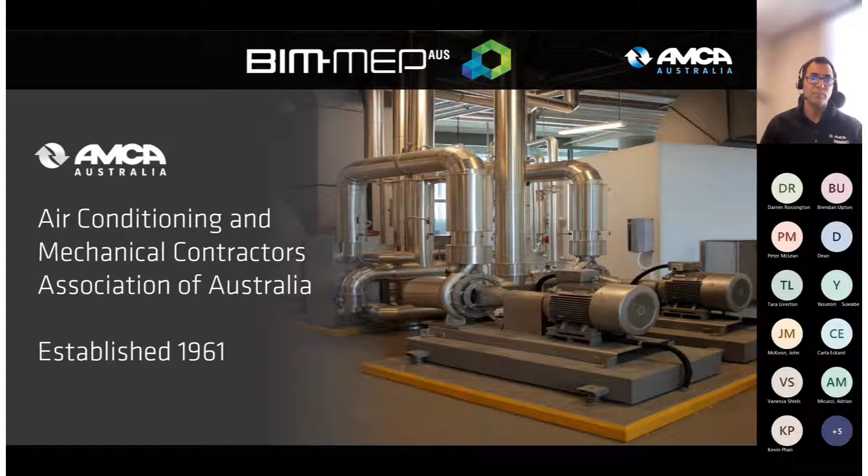So I'm just going to give you a bit of an update today before we go to Brendan. So just a little bit about the AMCA if you're unaware of who we are. So we're the Air Conditioning and Mechanical Contractors Association of Australia. We've been around since 1961. It's a national association, and we provide a range of services for our members. One of those is BIM-MEPAUS, which is AMCA Australia's initiative to drive digital transformation in the construction industry. And it's been running since about 2010.

The initiative itself is really a solution for consistent modelling and consistent documentation or asset information, really built by the industry for the industry. So we take industry needs into account in everything we do. So today I'm just going to quickly take you through some of the things that have changed over the last 12 to 18 months with regards to BIM-MEPAUS, what we're working on at the moment, and then what the future holds for the initiative.

So we've delivered quite a few projects over the last 12 to 18 months. Lots changed. So one of the things, quite a significant change for us, was a decision to bring full management of the BIM-MEPAUS initiative internally into AMCA Australia. So that really took off around April 2021. But from there, we then decided to create a whole new BIM-MEPAUS website to make it easier to manage our content and our subscription service.

Alongside that, in parallel, we created a completely new BIM-MEPAUS Revit template that was designed and built from scratch in parallel, as I said, with the website. And once those two things were really up and running and finished, that was around July 2021, and that's when we, I guess, officially relaunched BIM-MEPAUS and commenced management of the BIM-MEPAUS subscriptions internally and started engaging with the industry directly, which has been fantastic.

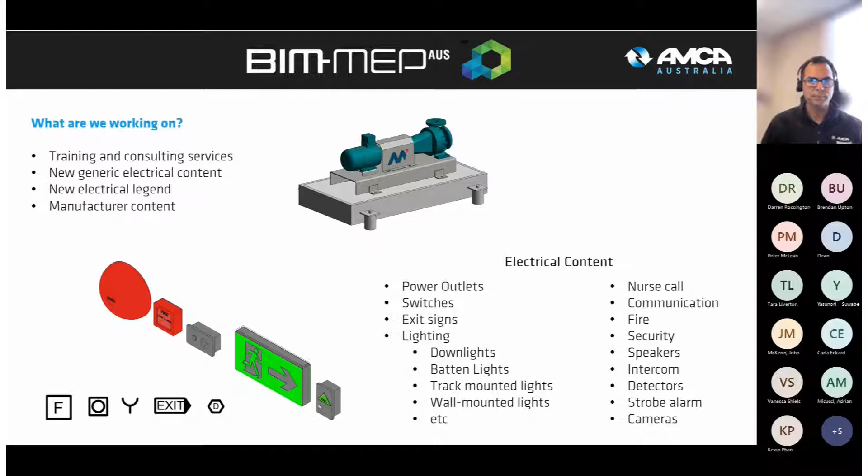So just in terms of that content strategy for manufacturers, we can really offer the manufacturers support and advice, and it's really based on 3 different scenarios. So if the manufacturer has a Revit expert in-house that develops their own content, we can work with that particular manufacturer and help them develop the content in line with BIM-MEP AUS specifications.

If the manufacturer has existing content, we can certainly do the same, review it and provide some feedback on its alignment to BIM-MEP AUS. And then if that manufacturer needs someone to create content for them, we've struck up a bit of a partnership with IGS, who are a local content developer here. So we're working with IGS to help manufacturers develop new content, and that's the path that Masterflow took.

Also, our manufacturer content strategy is not just important to BIM-MEP AUS but also to our members. Our AMCA National Board of Directors have recently written a letter to endorse the manufacturer content strategy, which we're sharing with manufacturers as well, really to develop that quality and fit for purpose content.

So we're really looking forward to doing more in this space over the next 6 to 12 months. What does the future hold? As I mentioned earlier, we're expanding our training program. I spoke about the pathway we're developing, the industry certification, the CPD points, weaving in the Autodesk Construction Cloud services. Our electrical content library and legend will continue to evolve and grow as well. I already spoke about the manufacturer strategy on the previous slide. Next year, we've also set dates for user groups.

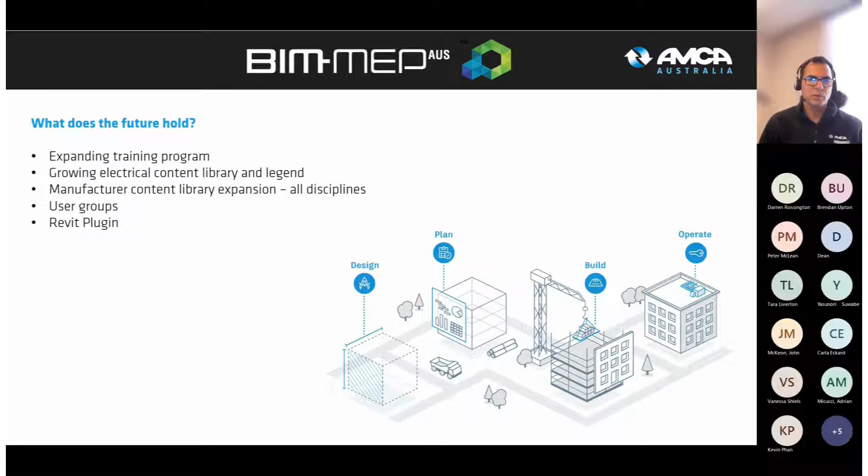Just before I move to Brendan, I'd like to let you all know that we've set a date for our Construction Innovation Forum. That's set for the 17th of May next year, in Melbourne. We're just in the planning phase at the moment, setting our streams and technical sessions and things like that. Keep an eye out for some of our news items to come out to provide more detail around the forum, and as we publish it, we'll also post things on our website to give you an update on these things.

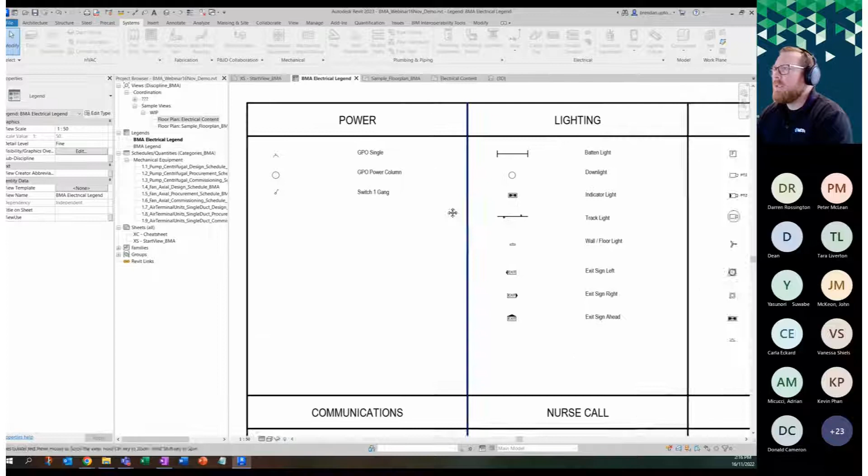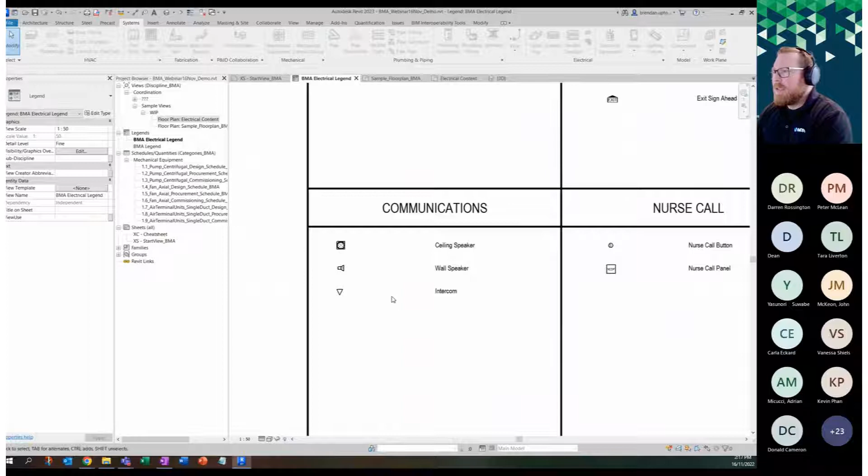We've got some lighting, typical kinds of lighting and exit lighting symbology families. We've got a group of security items, including cameras and detectors, etc. We've got communications, speakers, intercoms, and the beginnings of some nurse call families there as well. Now, all of these symbols that we're seeing here, I'll show you in a minute, we have the actual component families, 3D families for as well.

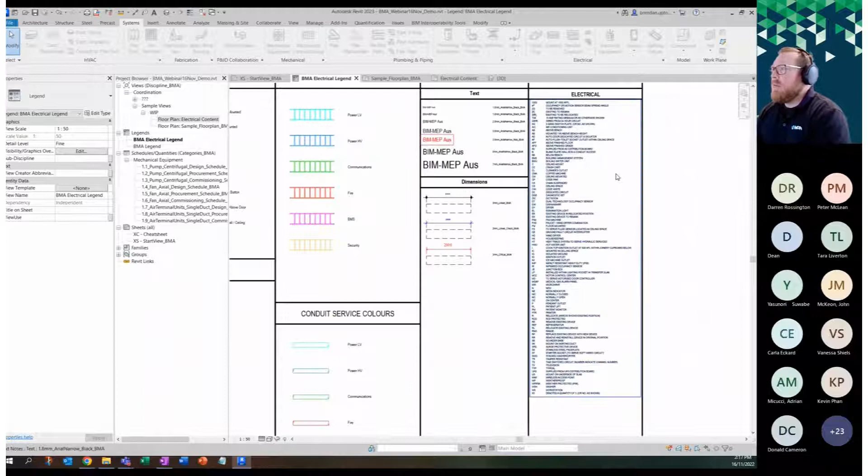We'll jump into those in a second, but just here also on this legend, you can see that we've started to bring in some typical electrical abbreviations, as well as your standard BIM-MEPAUS text styles and dimension styles. Also along with the cable tray and conduit service types and colorations there, as well as per the BIM-MEPAUS specifications.

So this is a starting point. Our goal here is to obviously expand this, as Shannon mentioned. When this is released shortly, we'll be keen to gain feedback from you as the users to say, what do we need to include, what further items do we need to add in, etc., and how are the symbols working and looking. It'll be good to start getting that feedback as it comes through, and we'll look to develop that further. So moving on to have a quick look at this actual electrical content.

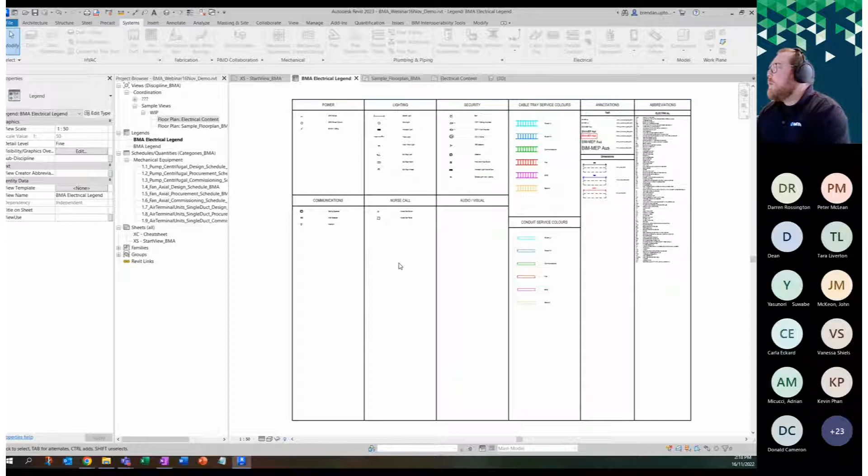If I jump into this view, these are the plan view symbols of those 3D families. If I jump into the 3D view, we can see a grouping of these families sitting here, so there's a bit of a selection. Our idea was to have a good kit of parts of the typical, more common families required in electrical design as a starting point.

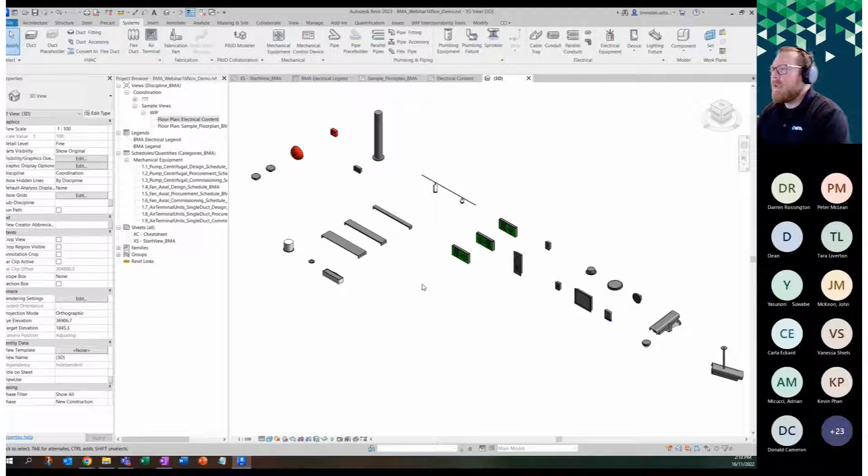And then we will go from there. These are all built to the same BIM-MEPAUS standards that you will be familiar with if you've used the template elsewhere in all of our existing generic content and manufactured content. So all built to the same standards.

Just to highlight some of the features to look out for in these families: they are all built as work plane based to give you as the user a bit more flexibility to place these into a project without having to rely on hosts, but still have the ability to align and lock them to hosts and planes as well.

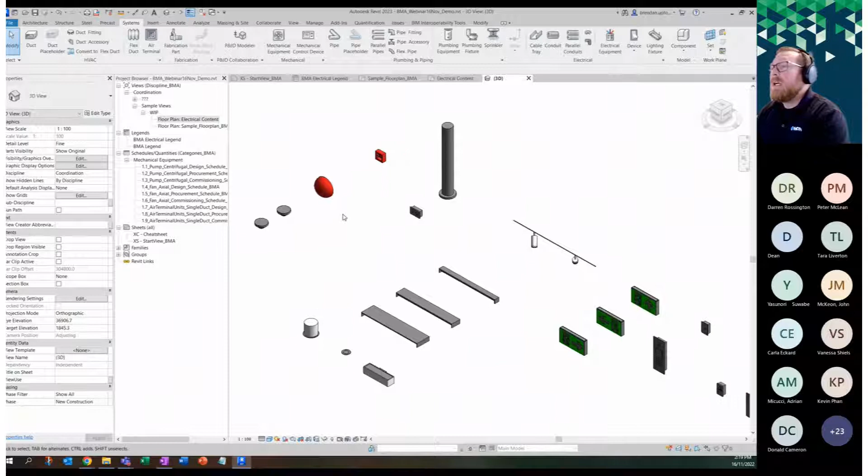Some other features to highlight, if I go back to plan view, if you change the detail level to fine, you will see the 3D geometry representation. But in coarse and medium is where you will see the symbology, the symbol representation of the families.

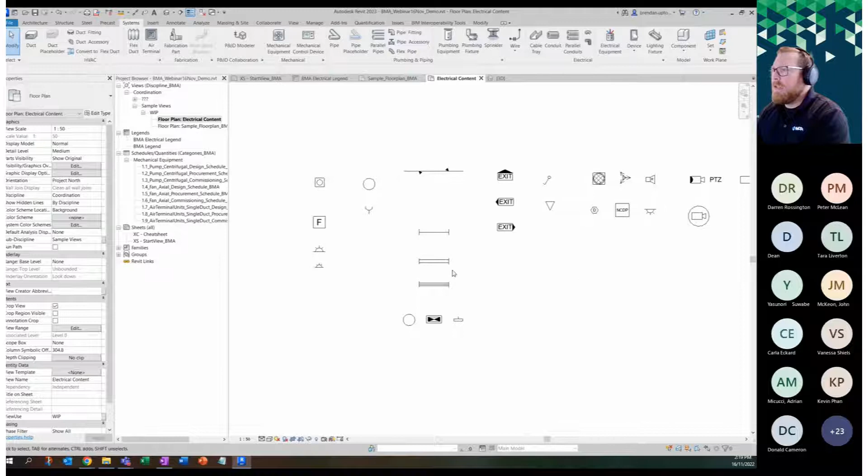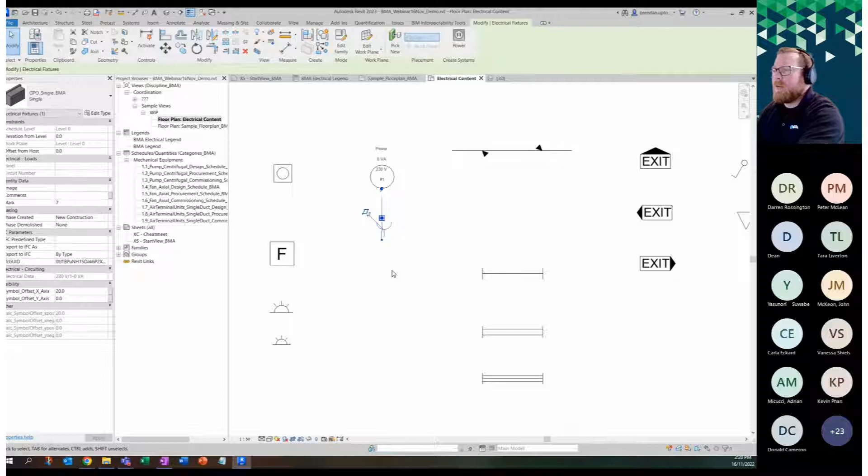Also, where applicable, we have incorporated the ability to offset the symbol independently of the 3D geometry. For example, the GPO outlet has offset X and Y axis controls, giving you the ability to push the symbol around if they're getting on top of each other, overlapping, or in line with each other in a plan sense on the wall.

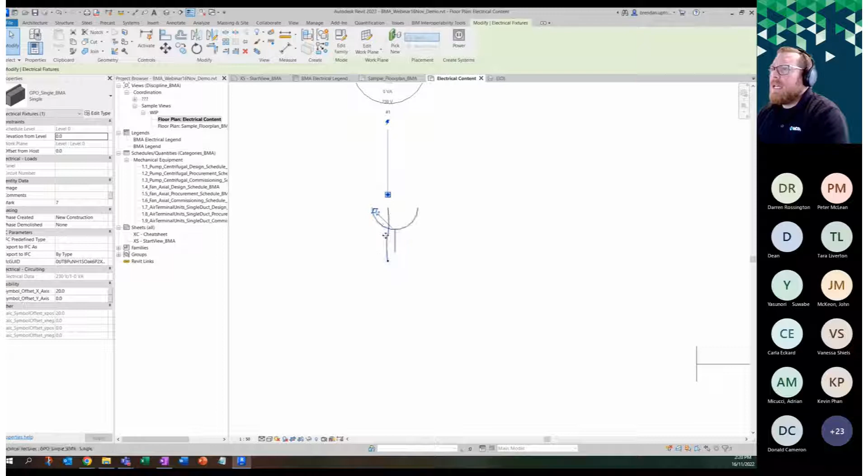One other thing to note, you might notice this little squiggly line here and wonder what that is. That's the room calculation point feature. For those who don't know, it's a feature that allows you, even if the family is sitting outside a space or room in the project, to use that point to position an endpoint into the room so that component gets calculated within a particular space or room. We've activated those on all the families where applicable.

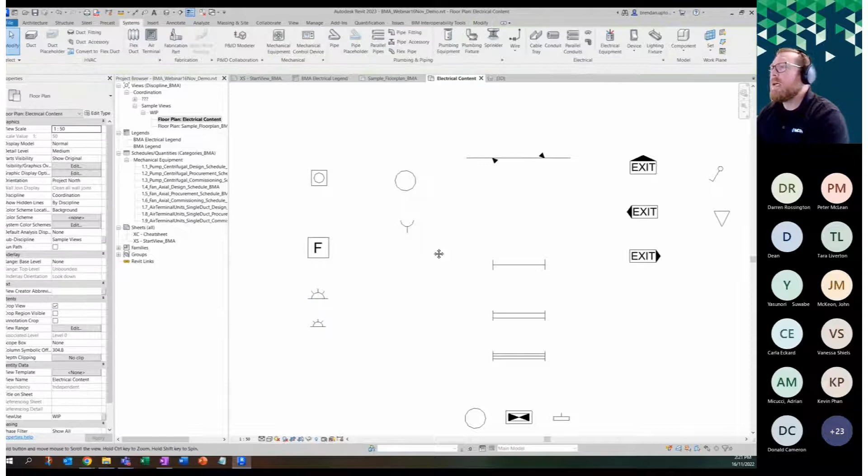We've got, like I said, these exit signs, which give you the ability to switch between different directions. So that's the starting point. I'm sure there's probably more we can do with exit signs as well, but again, this is a good starting point.

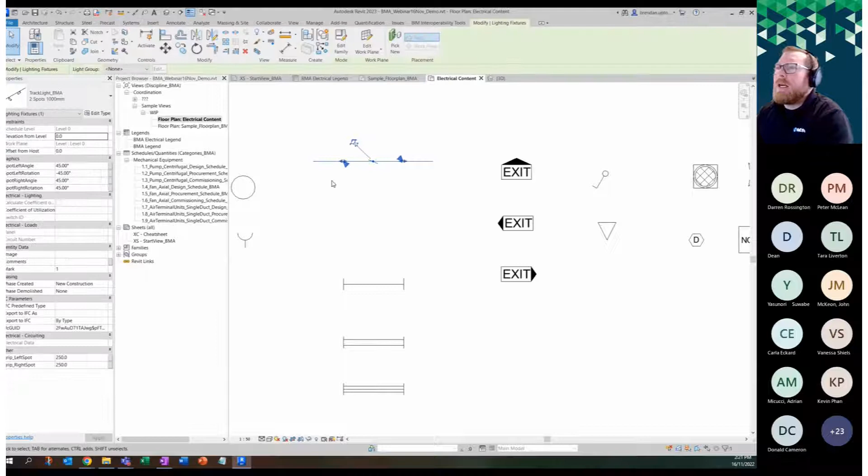Let's have a quick look at some of the lighting fixtures here. For something like the track lighting, we've given the ability to not only reposition these lights on the track, but also adjust the angle. So I could put it at a different angle there, and it will rotate the light fixture accordingly. You can see that's rotating the fixture. Also the tilt angle as well.

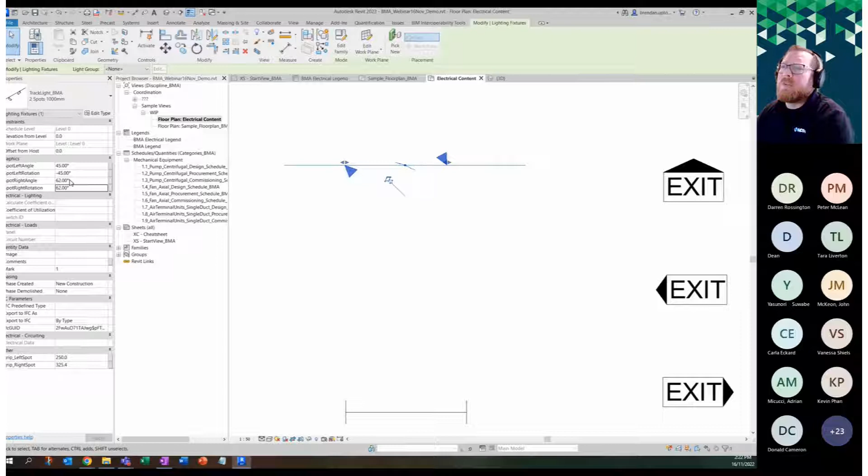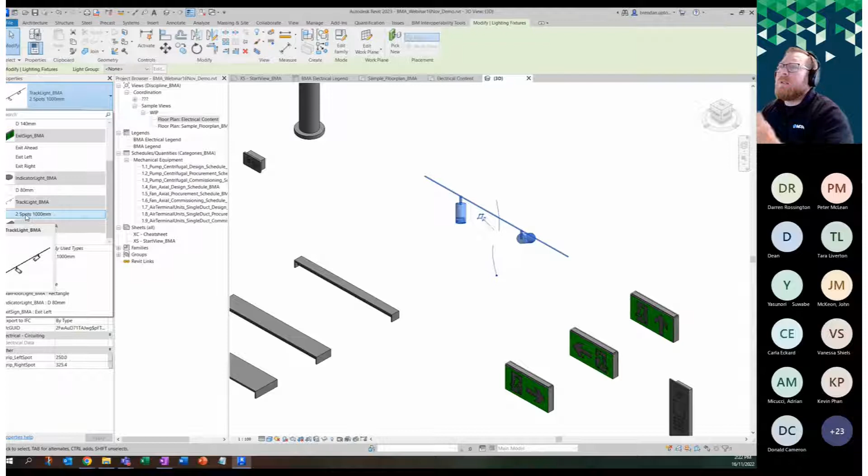If I go to the 3D view and adjust that, you can see it's rotating the fixture around, so a little bit of flexibility there. These can be placed and snapped together if there needs to be more in line. At the moment we've just got the two spots, but again in the future maybe there's room for that to be increased, to have the ability to add additional lights to the one track perhaps, so there's some opportunities there on that front.

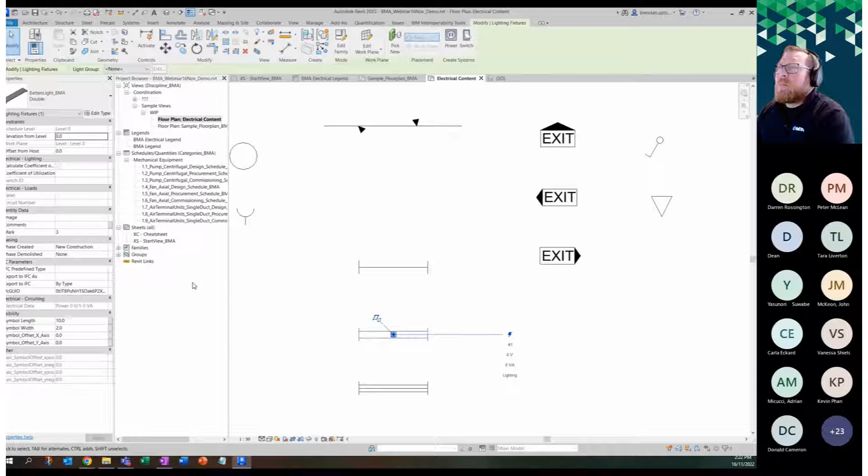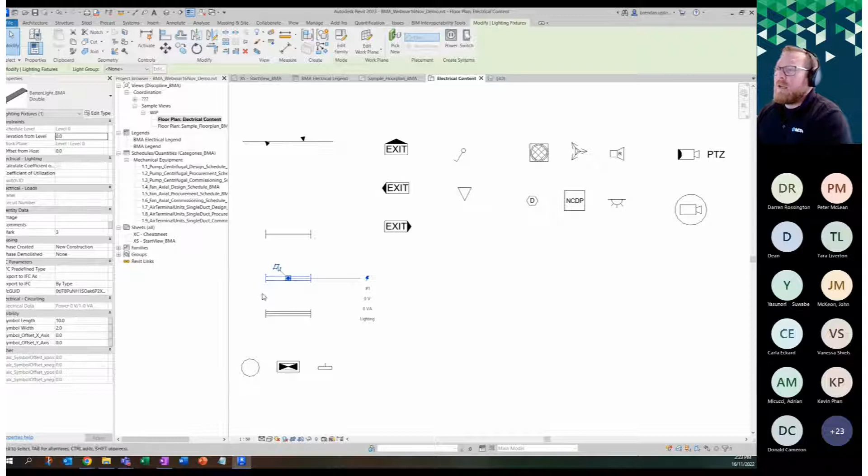One thing we have also taken into account is that we've added to these lighting fixtures, where applicable, compatibility with the photometric files that lighting analysis tools like Illume tools use. As Shannon mentioned, most of our electrical families, where applicable, are working with PowerCAD for cable sizing and other electrical calculations. In terms of lighting analysis, we are working as closely as we can with AGI and Illume tools to build these lighting fixtures to suit.

We are aware that many of you electrical engineers, consultants, and contractors are using something like Illume tools and want the ability to have these calculated within those sort of tool sets. So that's something we're looking at closely and keeping an eye on.

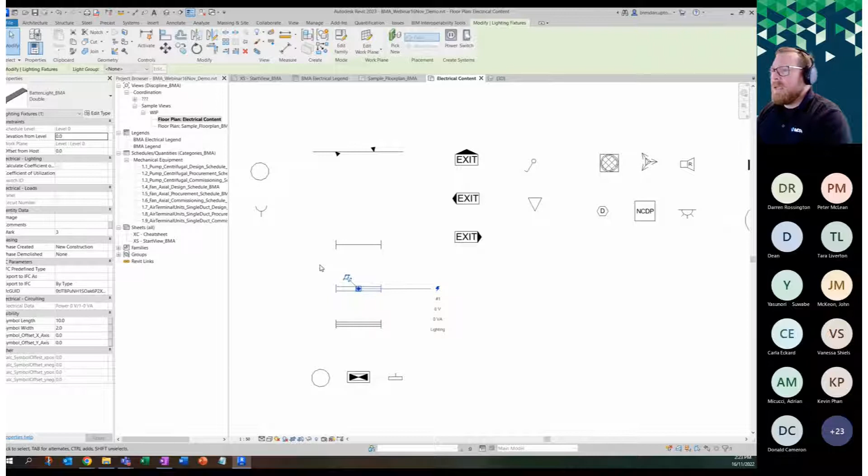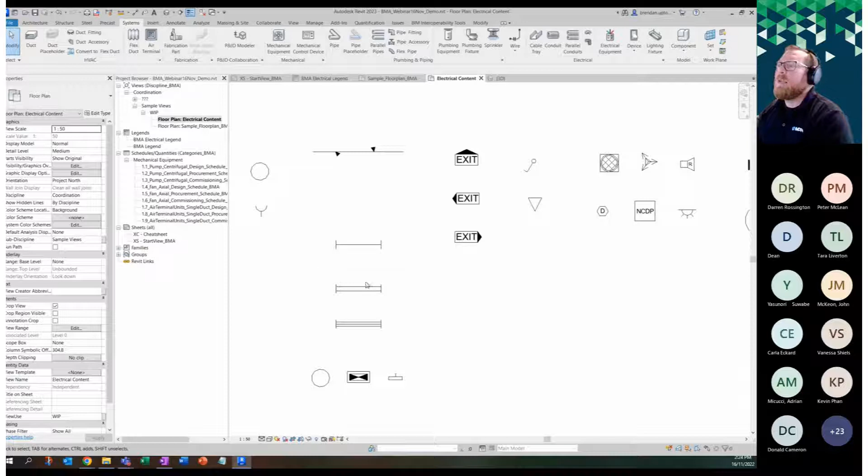Further to that, we're also looking at the training side of things that Shannon mentioned. We're working closely with AGI and the Illume tool set to incorporate some of that into our training moving forward, including some advanced training courses. Keep an eye out for more info on that coming through shortly.

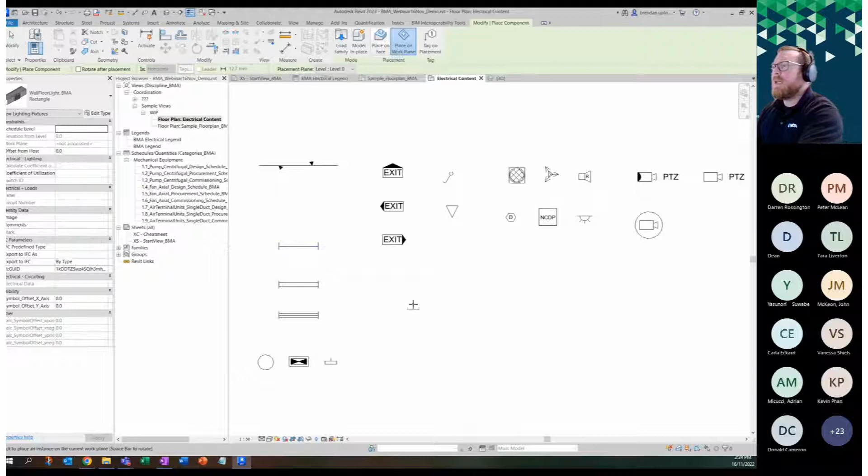So a few of those other lights - we've got down lights, typical down lights, indicator lights, and also a wall and/or floor light box. Again, it's work plane based, so when placing it in you can select place on work plane, and either align it to the floor or align it to a wall and adjust its offset from that level. That's how they all typically work.

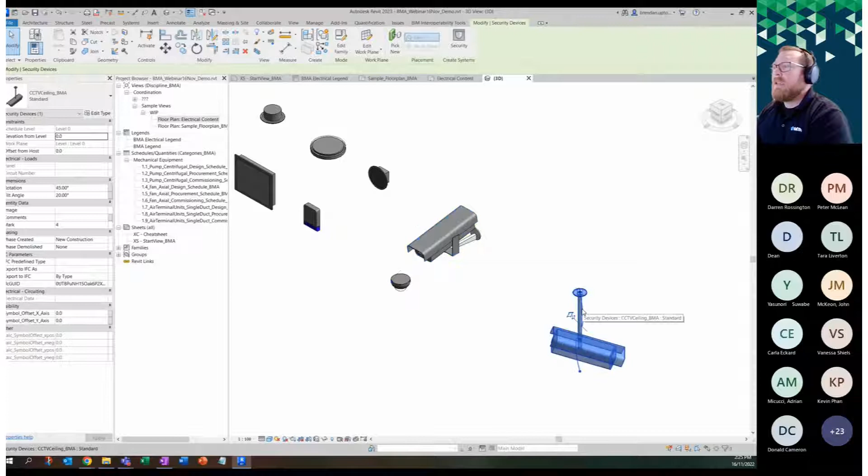Probably one of the last things to show you while we're on this content is, similarly to the others, some of the features of these cameras. These CCTV cameras - we've got a wall version and a ceiling mounted version. With both of these we have rotation and tilt angle options that allow us to adjust those values. If I adjust the tilt angle, I can get it to move around accordingly.

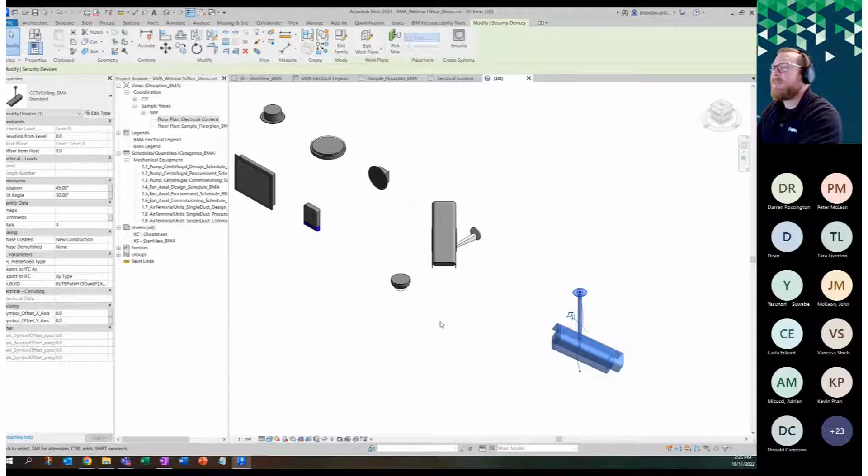Similarly with the ceiling one as well, we have a tilt angle here that can be adjusted. So if you're in the electrical discipline and have some use for these, we'll be very keen to get you testing these once released, and get your good feedback so we can continue to develop these further and build even better quality and additional items.

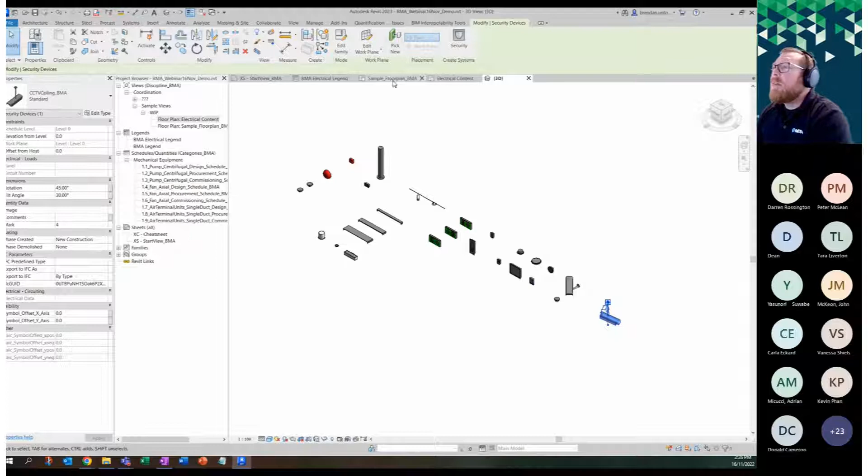So moving on, if I jump back to the floor plan view, there's another area I wanted to highlight. This has been in the template prior to this last release, but it's still fairly new, so some of you may not be as familiar with it. This is to do with cable trays.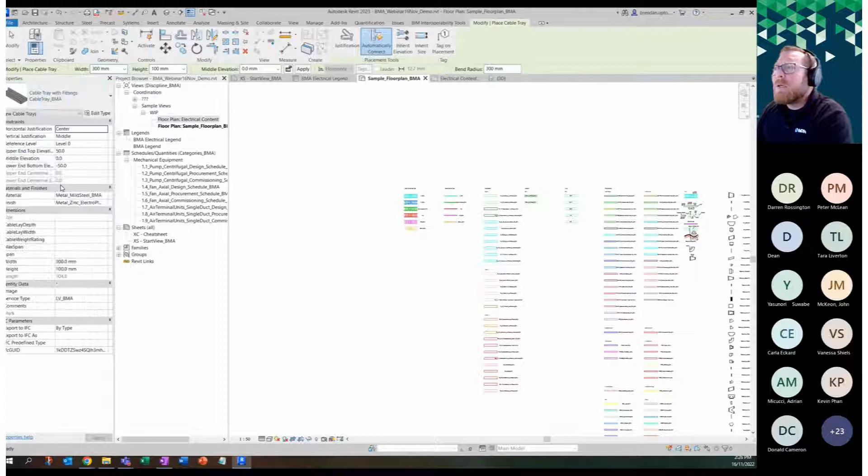Still while we're on the electrical topic - with cable trays there is a newer clearance zone functionality that we've introduced. I'll quickly explain how that works. If I jump across here and model a bit of cable tray really quickly, I might just change the elevation height there.

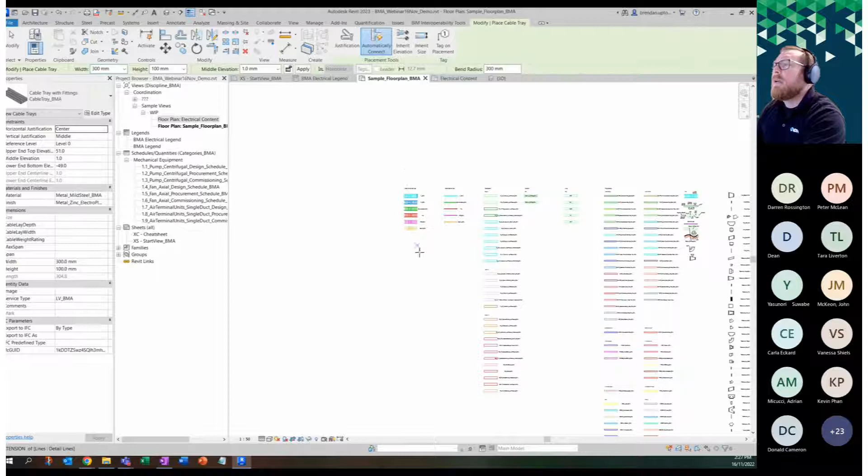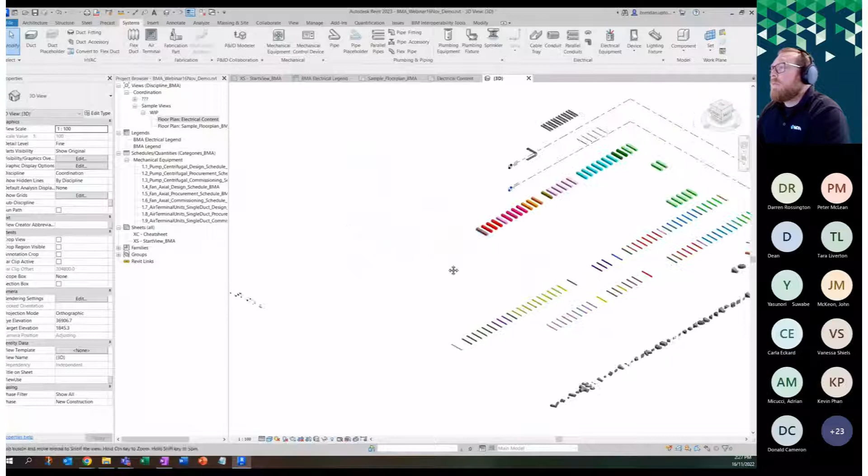So if I just draw a piece of cable tray here, I'll draw it, let's say 2100 long, and turn the corner, go 2100 again. Okay, so I've just drawn a very basic piece of cable tray here. I'll flick to the 3D view because it's a bit easier to show - here's that piece of cable tray I've just drawn. I'll zoom in on that.

Basically, prior to this functionality, what we had in terms of clearance zones was a separate family. Previously in the BIM-MEPAUS template, it was a separate family that was essentially just a changeable 3D box that users could trace over the top of any cable tray they had modeled, then change the height and width - that was essentially the clearance zone. It was a solid extrusion, with transparency so you could see through it, but it allowed it to be clashed against, so it allowed for cable tray brackets, rods, and that access area around it to be coordinated and clashed against.

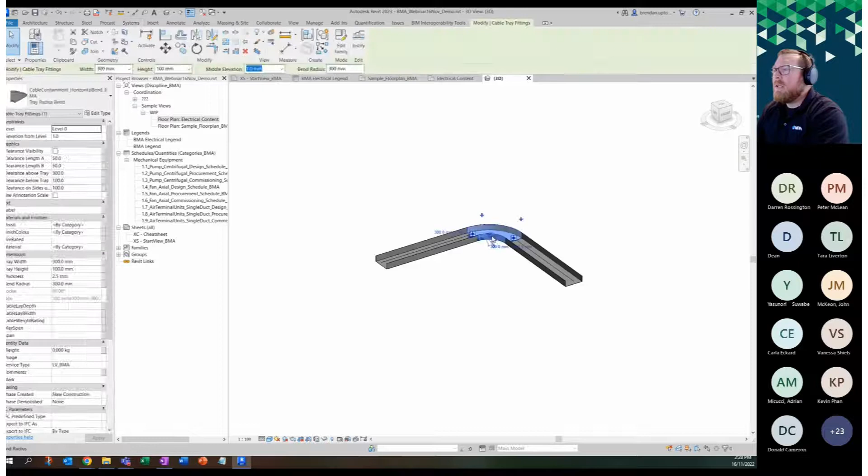That was all well and good, but it was a little bit limiting, and it meant a lot of management - if things moved, if the tray moved around, they had to come back and move with it, and it was a bit of mucking around. So the new iteration of this clearance zone and cable tray is a little bit better. It's still essentially a workaround to a certain extent, but it's more locked in and automated. I'll quickly explain.

Basically, what we've done is we've built into the actual cable tray fittings families a clearance zone solid geometry. So if I select that elbow there, that bend, I'll turn on the clearance visibility here. You can see it turns on that zone. And then we have some other options here for the clearance length A, length B, and also the height, so tray above, tray below, and width, so sides of tray.

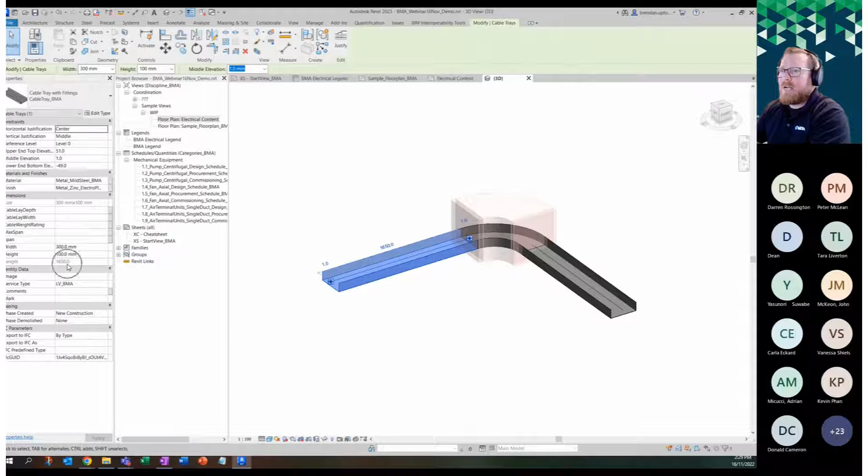So basically the idea is that it has an extension along the straight essentially. So the idea is that you interrogate and ascertain the length of the piece of straight. So it's 1650, and then you add that to the clearance length A parameter, and that will push that out there. This one here is about the same at 1650, so I'll do the same for clearance length B. Okay, and that will move that around.

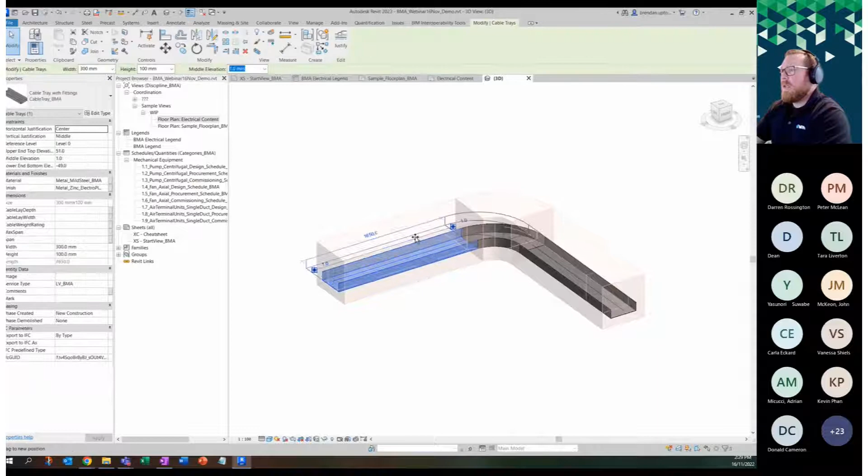So what that means is that if the tray moves to an extent, it will pretty much move with it. It just means that there'll be at least one length that you'll just need to update basically, but everything else will move with it. If it goes up and down, if the elevation changes, it's going to move with it. Okay, so it's a little bit better functionality there.

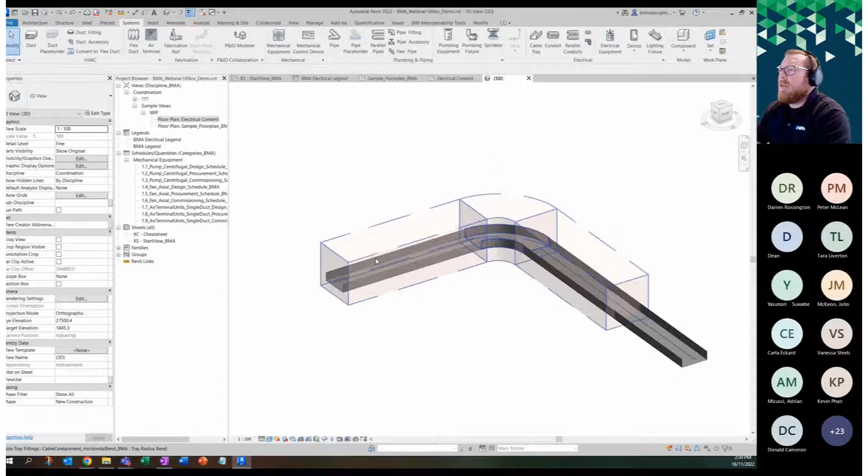And as I said, it is still just a solid extrusion. It's got a transparency on it, so it will allow you to be able to be clashed against, and you can change the height and the width of it as well. That's all done within the properties of the family. Okay, so just be aware of that.

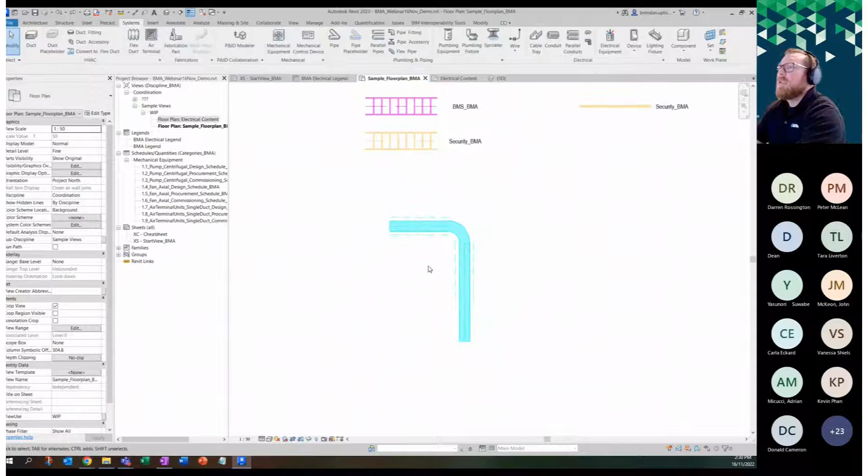If in the plan view, it has a representation to show that clearance zone on as well, if it is switched on. Okay, and within the template itself, there is actually a new little cheat sheet here view under the sheets section, and if you open that up, it has a bit more of an explanation about how that clearance zone works. So you can refer to that.

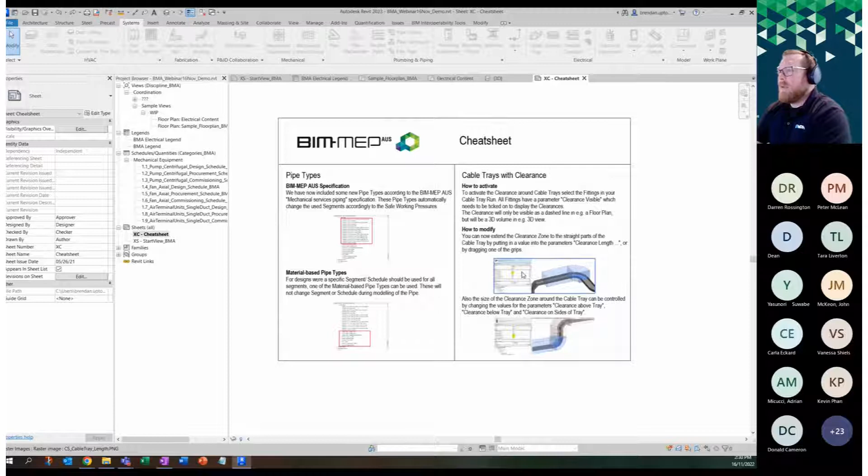But any questions on any of this functionality, obviously, you guys have the ability to reach out to us. There's always opportunities to ask questions and give feedback, as I said earlier. But this cheat sheet is something we will look to expand as we add more newer features into the template as well. It's a good way to communicate some of this functionality as well.

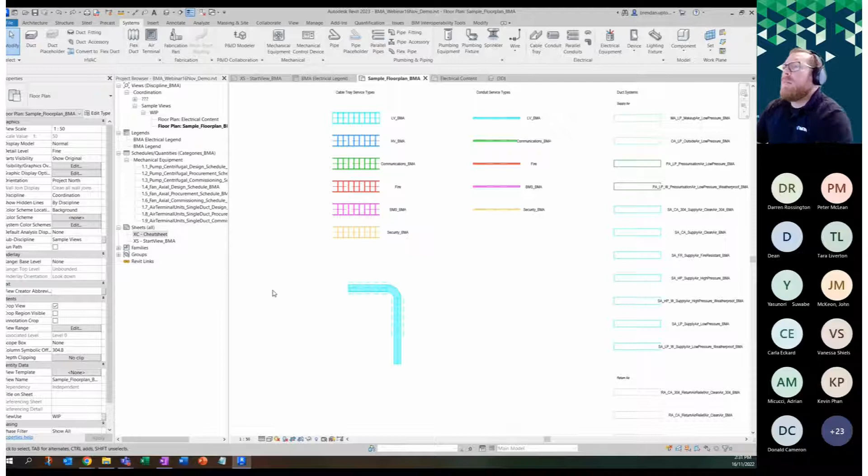All right, moving along, we have some on the piping side of things. Okay, something that's reasonably new as well.

If I jump over to the pipe tool, we have the same pipe types that we had previously in terms of material types. And for those of you that haven't seen, we then had those new pipe types introduced as per the BMA piping spec, which outlined the pressure classes and the jointing specifications for your different mechanical pipe work. So that's all still here.

We've got the different pressure ratings here, and then you can see, for example, you've got copper going up to diameter 50, and then it goes to copper press fit, and then above diameter 50, it goes to copper brazed. And so there's a whole bunch of those. There's carbon steel, there's welded, etc. So there's a whole range of those, and the details of those can be explained and can be referenced within the BIM-MEPAUS piping spec.

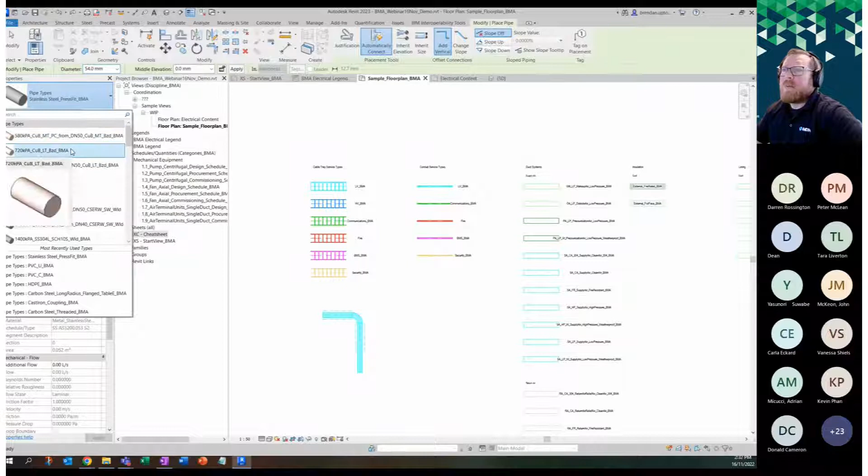So if you do want to know more about that, please refer to that, which you can access on the BIM-MEPAUS website under the specification section.

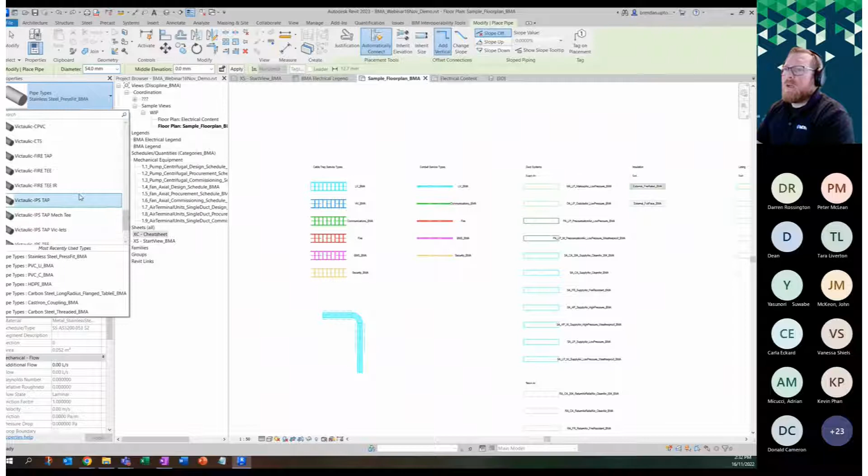But the other thing I just wanted to highlight here with regards to the piping is that we have also introduced, some of you might be familiar with previously, we had a couple of Victaulic pipe types in there. We have been working closely with Victaulic, as we always have been, and we've introduced essentially the entire sort of Victaulic piping range. And so you'll see there's a bunch more Victaulic pipe types in the template itself. And these have all been updated to the latest functionality for those as well. Okay, so be aware of that.

One little thing on the duct fittings to just highlight here as well is with the new iteration or new build of this template at the beginning of this year or end of last year, as Shannon mentioned.

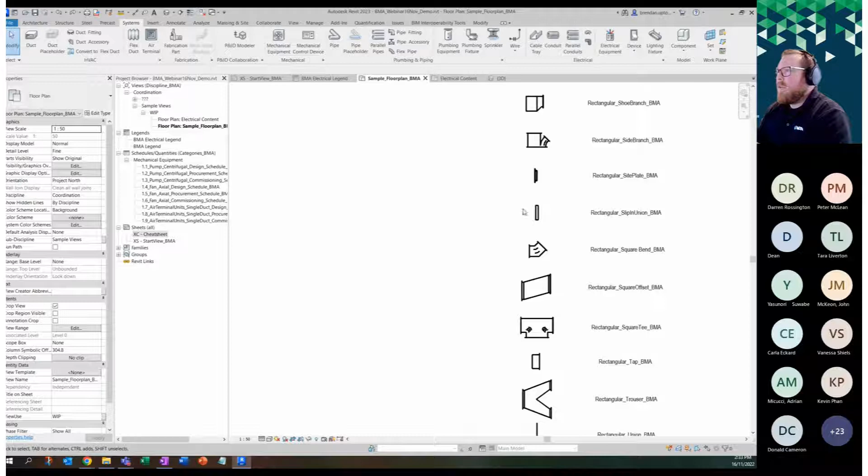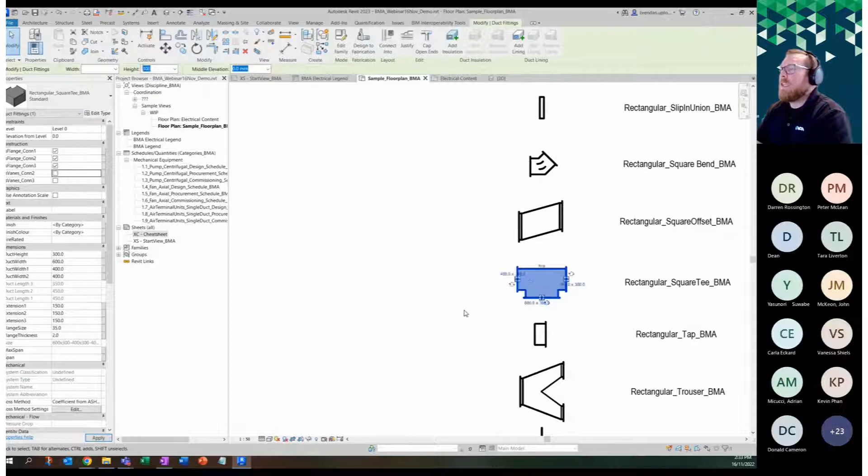Since then, there's a few things that we have been revisiting and refining as we go. One of those things is probably not so much a major thing, but is the turning vanes on applicable duct fittings. We're looking to make sure that those are all functioning correctly. So having the ability to turn those turning vanes on and off, and even potentially adding in some further functionality on those into the future too. So watch this space around that. We may have some more updates on that shortly, or within the next template release as well.

All right, I'm going to switch over to talk about the pumps now. So this is coming back to the manufacturer content. Shannon mentioned the Masterflow pumps, which we've done a bit of work with. We'll have a quick look at those, and I'll show you how they function within the template and how they, for example, schedule with our standard BIM-MEPAUS industry schedules that we have defined within the template.

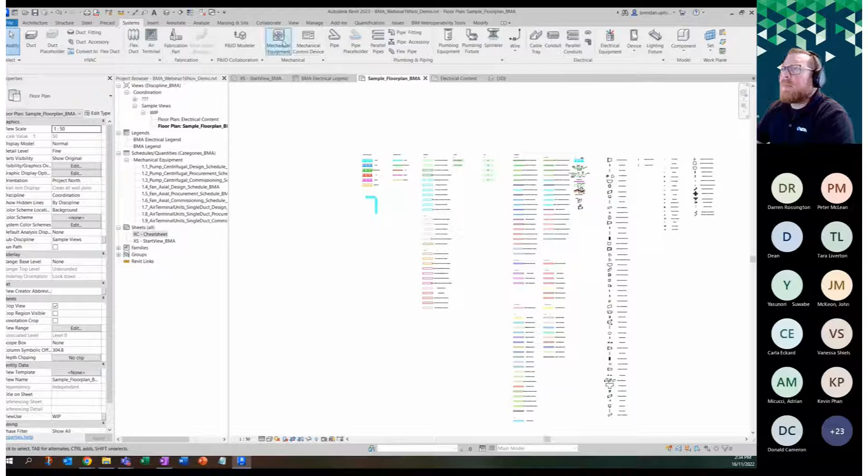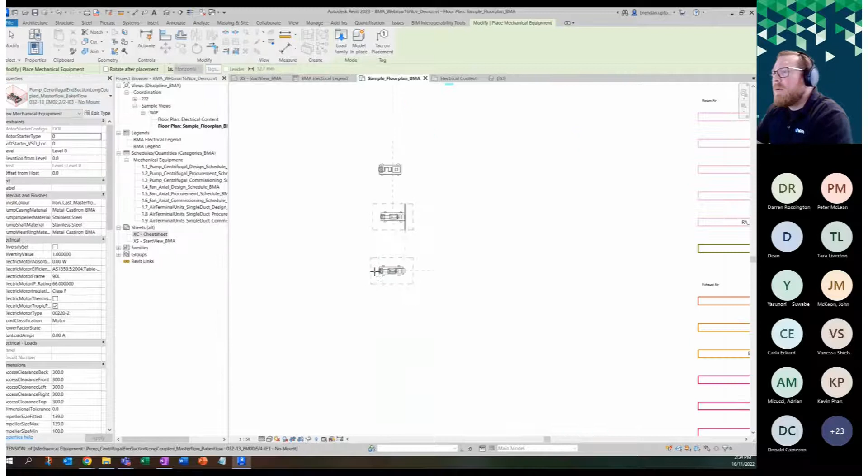So if I quickly place our BIM-MEPAUS generic pump, I'm just going to place one of those in here just for reference, so I can show you how that schedules. And then I'll bring in the Masterflow. I'll maybe do a couple of iterations of this Masterflow centrifugal pump here. So I'll do one, and I'll do the 2.2. That will do. Now, in terms of the functionality of these Masterflow pumps, I'll just jump to the 3D view. So here they are.

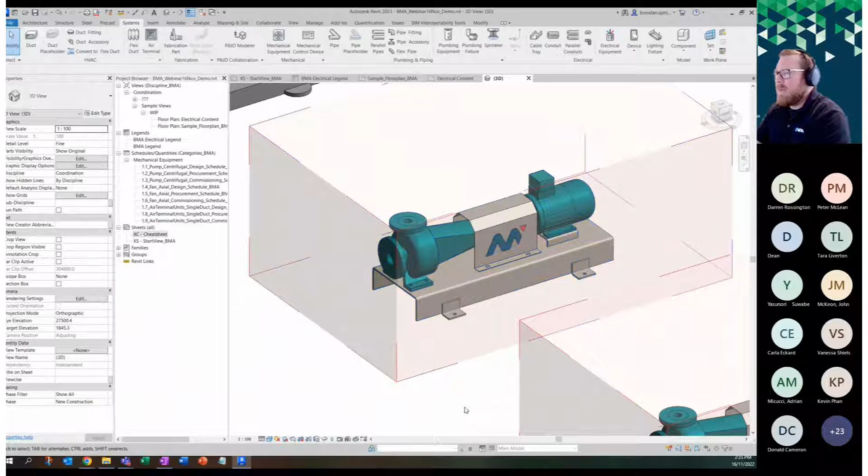So first of all, graphically they're looking pretty good. Geometrically, they are as detailed as they need to be, but not over modeled. So they're still quite efficient families, but they still look quite decent and look the part. Like what we always say with the manufacturer content or any content in BIM-MEPAUS, looking at it, it's generally easily recognizable as to what it actually is, and further to that, what actual manufacturer it is as well. So you can see we've got the Masterflow logo and whatnot. But more importantly, the functionality of the family. We've got things like clearance zones that are able to be switched off and on and resized.

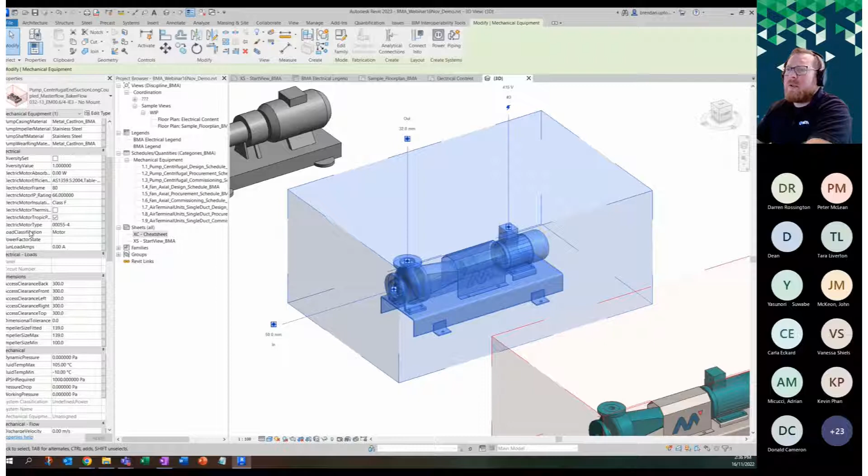And then even more importantly is the data side of things. We've got the whole gamut of the BIM-MEPAUS shared parameter data sets that are loaded in and accessible on the family. So not only has this been built to the manufacturer Masterflow specifications, but as we always do with the manufacturer content, we've incorporated the BIM-MEPAUS shared parameters where applicable, so that they schedule accordingly in our projects. I'll give you a quick look at that now.

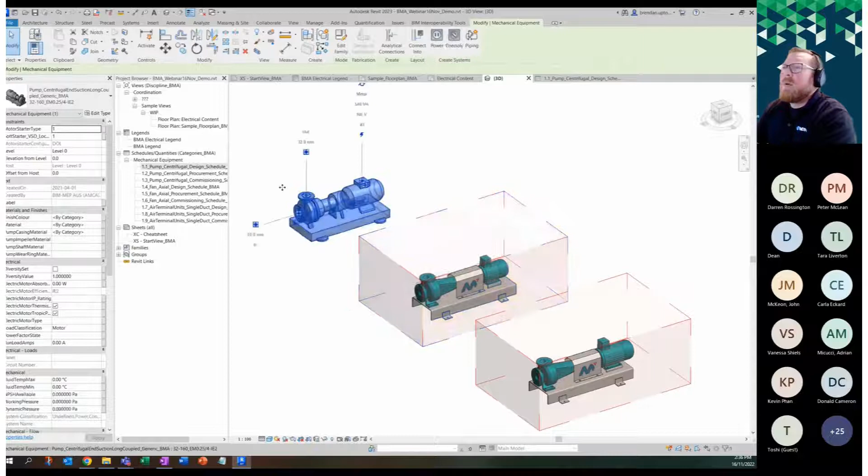If I jump over to the centrifugal pump schedules here, and go to the design schedule, which essentially will just display generic pumps, which is what this one is. If I jump into that schedule view, you can see there's that generic pump, and I'm not seeing the Masterflow ones because there's filters in the background to control what's shown on what schedule. If I have a look at the properties of the generic pump, you can see under the identity data that it is just a generic, and BIM-MEPAUS is displayed here as the manufacturer, because it's just a generic pump. There's no branding.

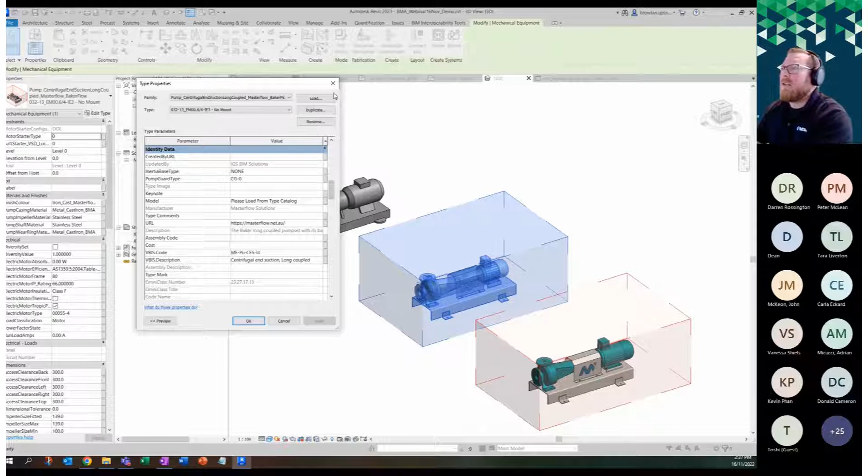Whereas if I click on the Masterflow pump and we have a look under the identity data, you can see that it has Masterflow in there and details about its model and model codes and things like that. As well, we've introduced VBIS codes into this, which we are heavily using nowadays for categorization, filtering, scheduling and data export. So that is what Revit uses to differentiate this from a generic pump, and hence why it displays in certain schedules and doesn't in others. So coming back to the schedule view, there's a filter to say only show the generic pumps in the design schedule.

And then as we come across to the procurement schedule, you can see there's those two rows representing those two Masterflow pumps that I placed in this project. And here's a clear representation of the detail of what parameters are included. These are all BIM-MEPAUS parameter sets. Some of these values in this case will be 0 or not calculated because it's not connected into a system at this point.

But you can see most of this is for the user to then start to fill out and populate. So just to be aware that, just like all of our other manufactured content, these pumps are built to that same consistent standard so that they will schedule correctly. And then you are able to pull that information out of Revit and go outside to other databases for procurement, for commissioning, moving forward into the project phases as well, for example. Okay.

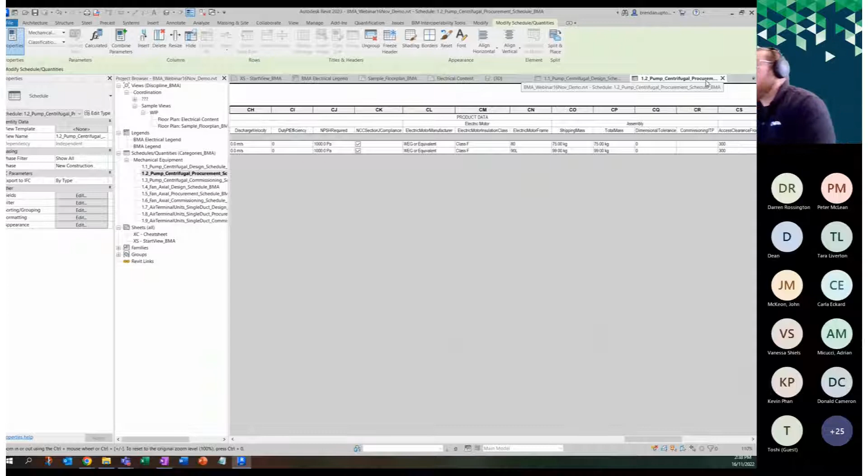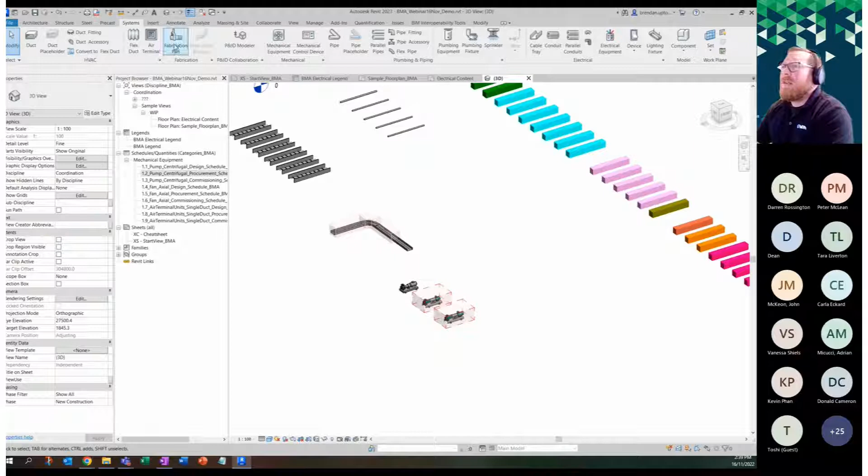The last thing I just wanted to jump into here, guys, was to have a quick look at the fabrication content. Shannon mentioned that there has been an update to that content over the last 6 to 12 months. A couple of major updates and overhauls, rebuilds of the database. So I just wanted to highlight some of those. There's quite a lot of updates, and you can reference the whole list of updates on our website. If you go to the fabrication content section, there are some PDF documents that you can download.

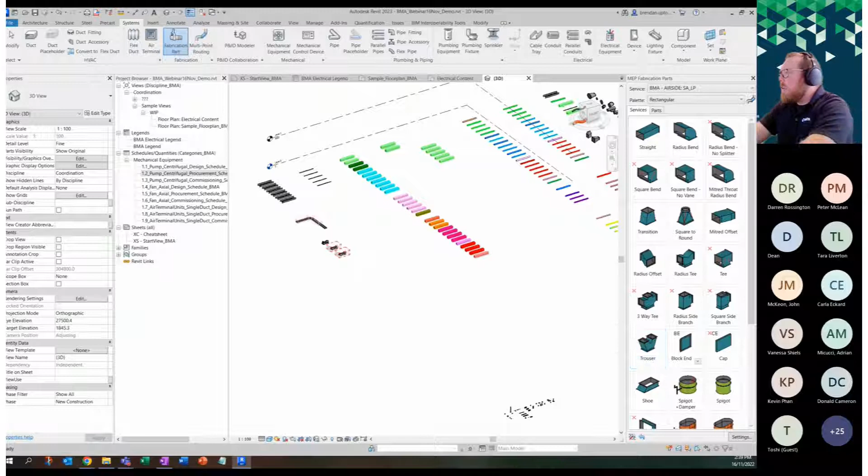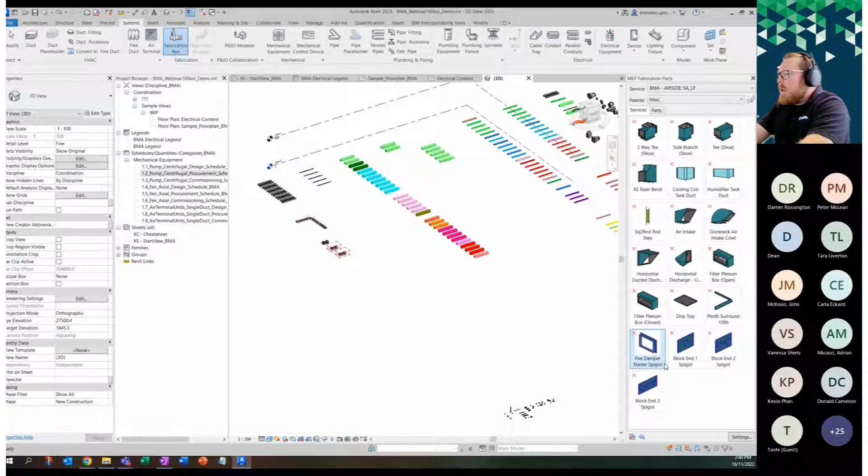But just to highlight some of the main ones, as Shannon mentioned, there have been some new services introduced. So we've got the stainless steel services through 304 and 316. We've also got the aluminium services, so they've been added in. Some additional items have been added in, particularly if I go to the miscellaneous palette here. We've got things like these block ends, so block ends with 1, 2, or 3 spigots. Okay.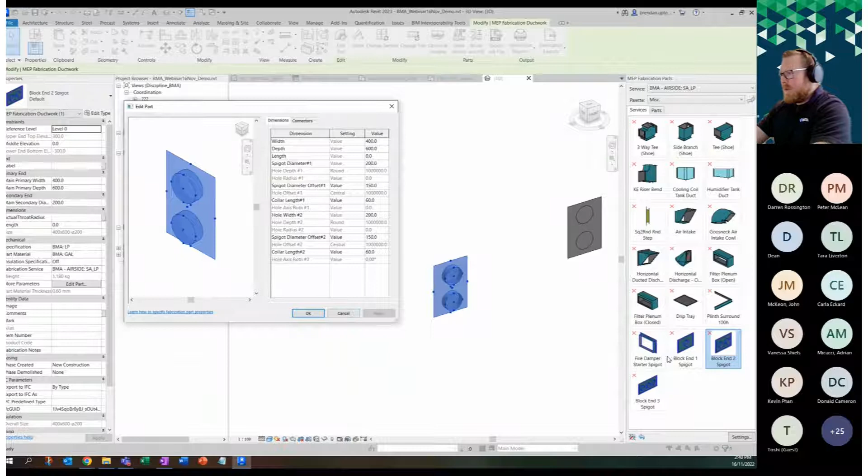Spin that around. So you can see you've got the ability to edit those now, and you can control, to a certain extent, the sizes of those spigots and where they're positioned, whether they're central or whereabouts they are positioned in the diameters and things like that as well. So there's some new items there for those block ends.

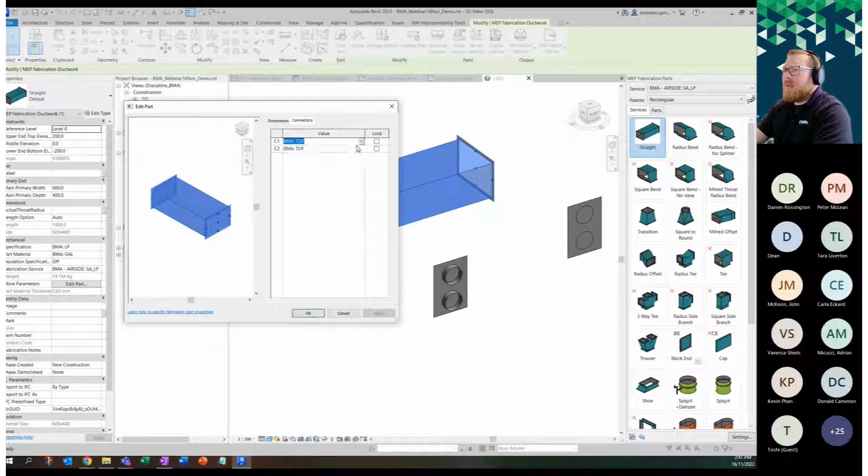There's been some updates to connectors across the board as well. If I just go back to the rectangular, and I grab and edit just a standard piece here. Inside of the connectors here, there's been some updates to this connector list. It's been overhauled a little bit, cleaned up. Some updates to the TDF, particularly TDF connectors and steps as well. So be aware of that if that's something that you need to access. Okay.

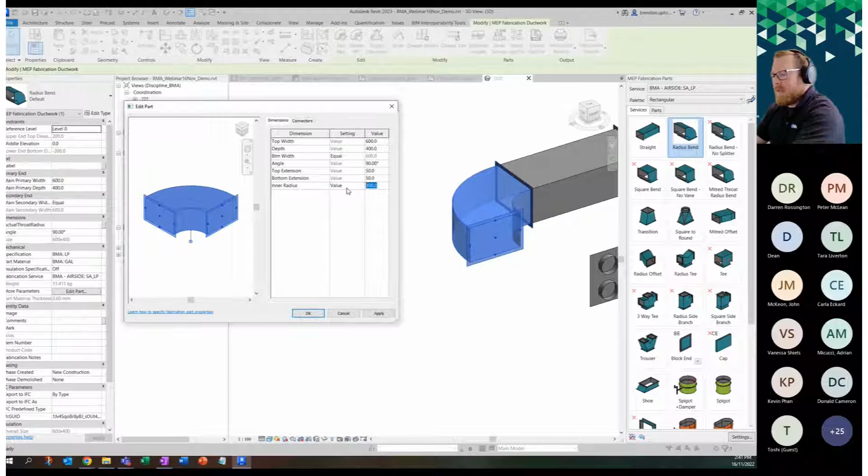Bends with no vane splitter option. So the radius bend is there, but there's also been a radius bend no splitter added in as an option as well. So this gives you, for example, the ability to, if I add that one in there and edit that part, at the moment it's a half width radius. If I change that to something a bit smaller, you can see then the splitters added in. But we do have the option to have no splitters in there now as well. So again, keep that in mind.

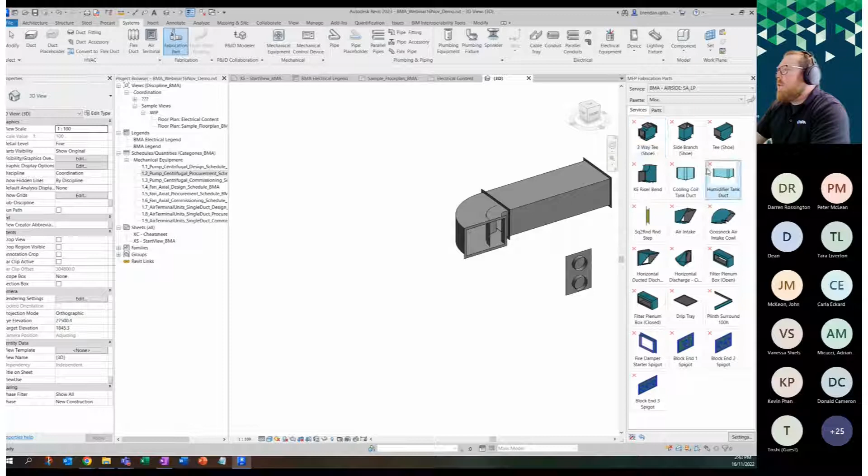And then also back in the miscellaneous area here, we've got some additional fittings like double and three-way shoe pieces. Some of these pieces that weren't there previously have been added in, as well as some of these plenum boxes and other more bespoke or niche fittings in here that are not typical ones. We've also got the dampers in there as well, if you're not already aware.

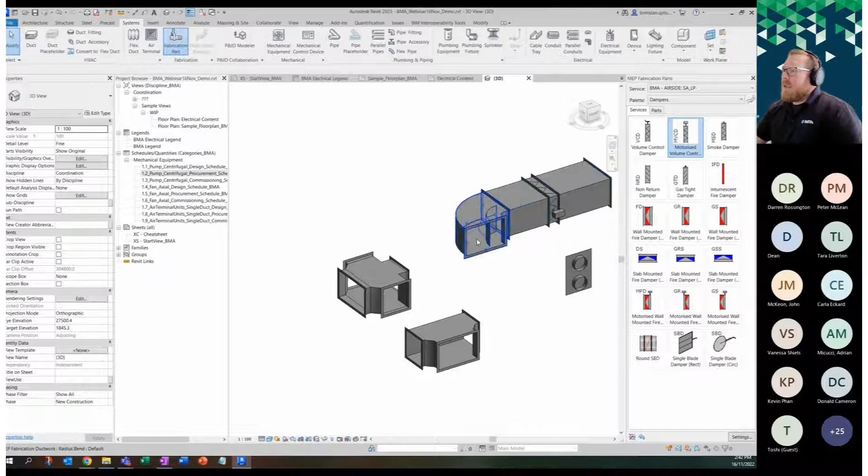And with your exporting out from Revit to MAJ as well, in Revit 2023 at least, there's a lot more options to export inline parts, for example. So if you've got a damper on a run, you can export that out, and you have the option to export it out as a Revit family, or even as another particular ITM part or fabrication part. So there's some options on that front as well. So we've just continued to expand that library out. The hangers are pretty much what were there previously, and again, they work quite smartly if you're not already aware.

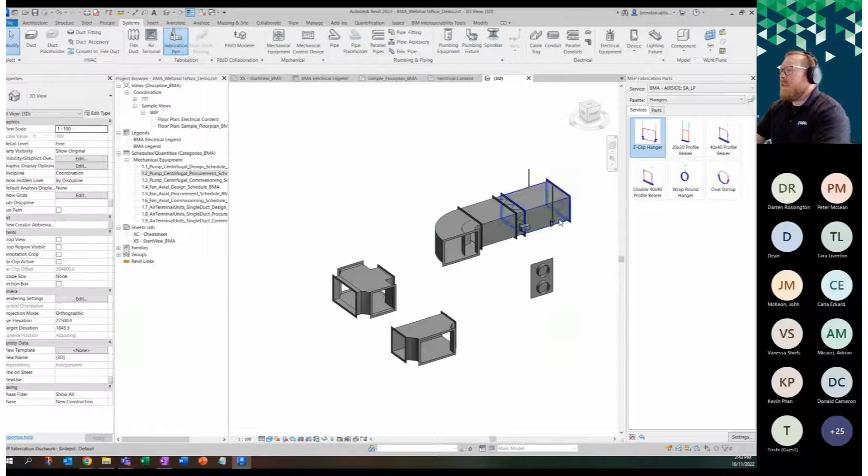Something that we're very excited about, as Shannon mentioned, is the beginnings of our development into API Revit plugins for some of these workflows. Shannon mentioned the tagging and the detailing side of things and duct numbering. Another area that we are potentially looking at, possibly in the future next year, is some tools around the hangers as well. So watch this space. We could have some information there on that front as well.

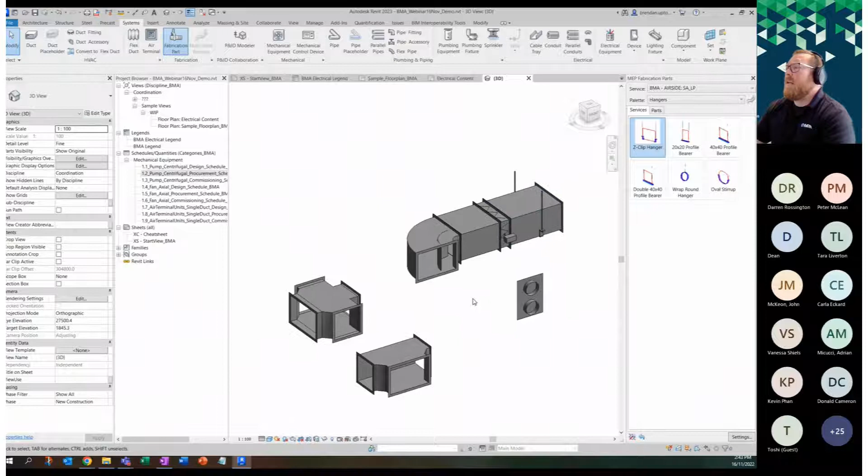But with that, I think that's probably it for me, Shannon. So I will hand it back over to you, and thank you very much. No worries. Thanks, Brendan. Great, fantastic demonstration as always. So really well explained. Brendan, I might just keep you there, mate, if you can. While we're waiting for some questions, I think Kwok's actually presented one. G'day, Kwok. How you going? I'll just read this out.

So great presentation, Brendan. Glad to see the latest updates. I just have a question regarding cable trays. Though we have nominal widths, do we have options to set actual width of cable trays, or would the best way to do that be by utilizing the clearance component?

We have included some sizing in the cable tray, as much as you can do. They're just a little bit limited with Revit. I wonder if you're referring to Revit cable tray or fabrication cable tray. But either way, with the Revit cable tray, we have included the sizes in the size catalog when you go into the backend settings.

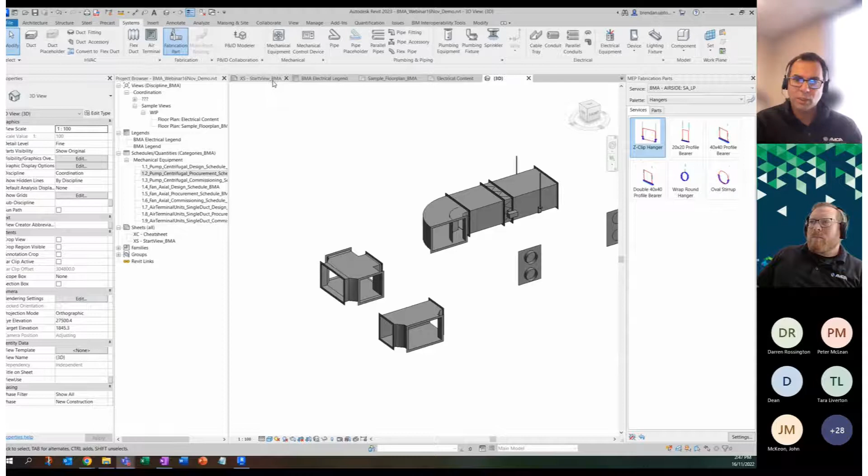Question here from John McKeon. Thanks for the demo. Anything on bus ducts? That's probably something I can answer. We would be looking at that in 2023. We've had a fair few questions from the industry around the multidiscipline aspect of BIM-MEP AUS. In the past it's been heavily favoured towards mechanical, but hopefully now you can see we are certainly pushing the multidiscipline aspect, and there's a whole bunch of additional electrical content to come based on what Brendan demonstrated today.

Bus ducts, just being transparent, we'll put that on the list. I know a lot of electrical consultants, engineers and contractors are asking for the same thing. So yeah.

Certainly some same questions come from PowerCAD about the opportunities to develop that too. So, but look, something we would certainly look to tackle in 2023. Hopefully that gives you an idea. But look, part of our user groups too, we will try to listen to the needs of the industry and then perhaps prioritize some of the things that you would ask us to work on sooner rather than later.

So if you're not able to get to some of the user groups, certainly post some queries or questions through our website, but we'll certainly keep bus ducts down as an option to look at for next year. Certainly if there's any other questions, run them in the chat.

Maybe just Brendan, if I could throw to you, and you might have explained this, but just to elaborate on those electrical families that we've got, is there options on how you place them? So in terms of, can they be hosted in a wall, in free space, that type of thing? And is there flexibility around the way the families have been created, or the options to how they're placed in a model? So if a new architectural model comes through and it's linked and something moves, how does that affect the placement of the families?

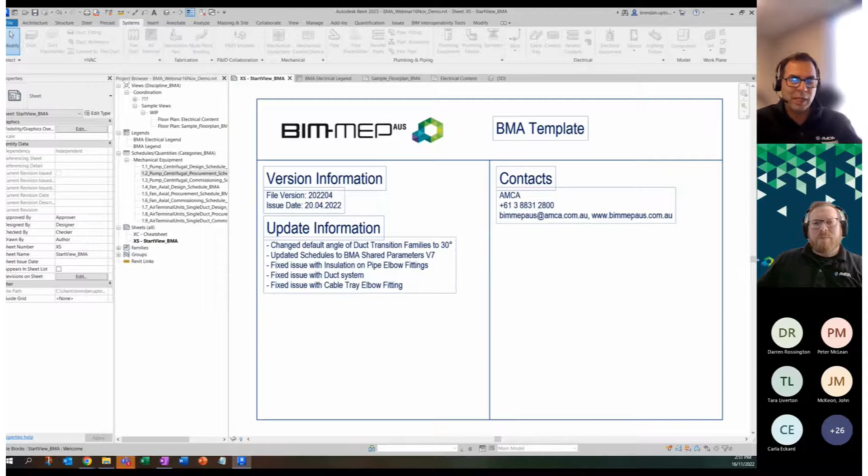So in terms of the depth of the VBIS structure, we would typically place them as a type parameter rather than an instance, mainly because the level of the VBIS code structure doesn't dig down deep enough to label each family as an instance. If there are any things where that might be incorrect or we've got that wrong, certainly reach out to us and let us know where you would want to have a VBIS code as an instance.

The beauty is we can go back to the VBIS guys and let them know that this has come up as a potential issue, and if it could be maybe a code missing for a particular product. I think the beauty of the VBIS code and system is it's Australian based. It's based on Australian products.

So typically it would cover all Australian products, and if not, they're pretty quick to respond with new codes, and then we can weave them into either the BIM-MEPAUS content or manufacturer content, or at least they're then available for you guys to use the interoperability tools to populate your families with those particular VBIS codes. So hopefully that answered that question from Julian. If I've got that wrong, just reach out, please, mate.

Another one here. Good morning. I have one question for the color of the fabrication systems. How do you change the color of the fabrication element? So it's the same way you change it in Revit. Yeah, I could probably answer that one, Shan. So there are still some limitations on that one, unfortunately.

In Revit 2023 at least, I think possibly in 2022, although I'd have to check, the filterings do work. You can adjust colors of the fabrication content, like you can with Revit content. But just be aware that has been a bit limited in past versions of Revit. So if you're in an older version of Revit, you probably find you can't add view filters, you can't change colors and whatnot.